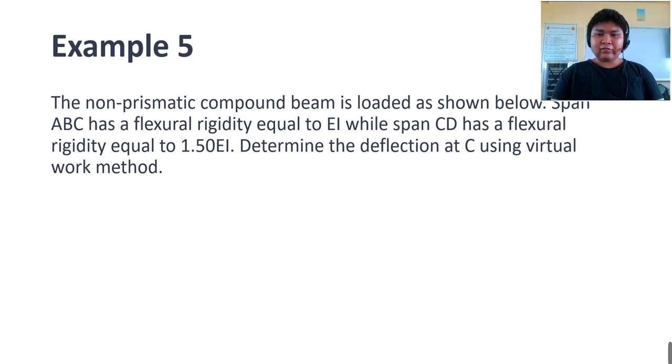So what we will discuss for our lecture video is this example number 5 that you see on your screen. Let's begin solving it. According to the problem, the non-prismatic compound beam is loaded as shown below. Span ABC has a flexural rigidity equal to EI, while span CD has a flexural rigidity equal to 1.5 EI. Determine the deflection at C using the virtual work method.

So this is the beam we will discuss, and I think you're already familiar with it because we already solved the deflection at C using the double integration method. So this time, how will we use the method of virtual work to solve for its deflection?

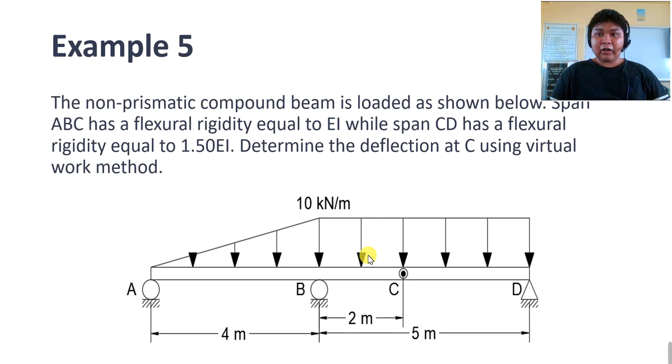So let's go to OneNote. I already pasted the problem. The only thing being asked is the deflection at C. Please take note that this beam is non-prismatic because ABC has a flexural rigidity of EI while CD has a flexural rigidity of 1.5 EI. Okay, so let's start with the solution.

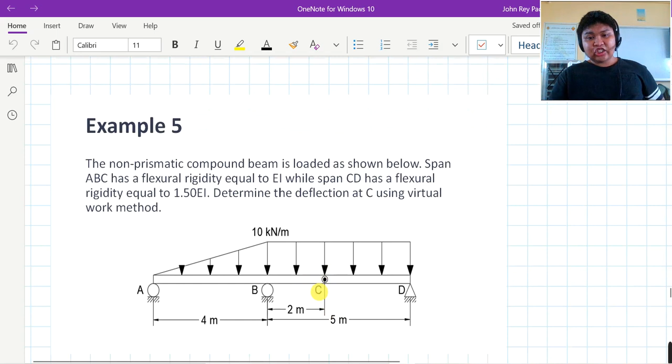The first step is of course to compute the support reactions. For compound beams, we cut at the location of the internal pin, then we find the pin reaction. After that, using equilibrium, we solve for the support reactions.

So here, the reaction at A is 35/6 pointing down. The reaction at B is 365/6 pointing up, and the reaction at D is 15. The reaction at C, since it's an internal pin, is also 15.

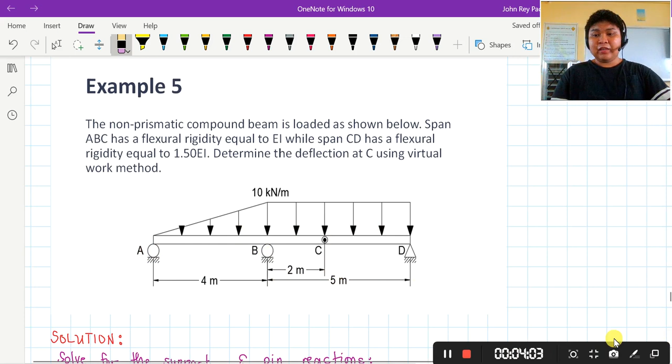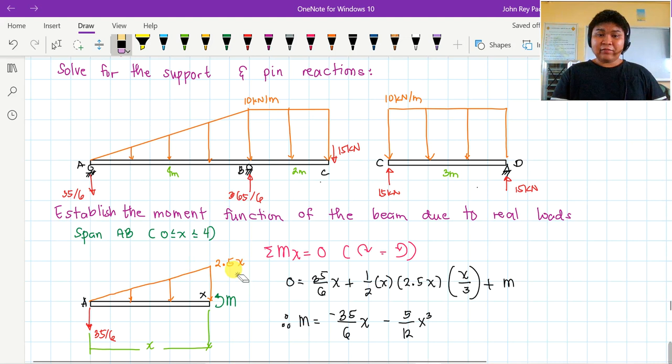Since it's a triangle, I worked out the ratio and proportion myself, so this is 2.5x. If you want to verify this ratio and proportion for the triangle, you may pause this video for a while - that is 2.5x. Let's just do it quickly: here's the triangle, here's the distance x, and the original base of our triangle is 4 meters.

Di ba? So, ito siya. Tapos, yung original height niya ay 10. Hanapin natin ang y. So, y is to x is equal to 10 is to 4, di ba? So, ang kalalabasan dyan, class, 10 over 4 is 2.5, di ba? So therefore, y is equal to 2.5x. So ayan, no? I hope nasundan nyo yung pagka-ratio and proportion ko ng triangle.

Erase na natin to. So next na i-consider natin class is lagay natin yung 35 over 6 na pababa at a distance x. So taking summation moment at the point of cut, yung point x natin, mahahanap mo na yung capital M function natin ay negative 35 over 6x minus 5 over 12 x cubed. Okay, so ayan na siya.

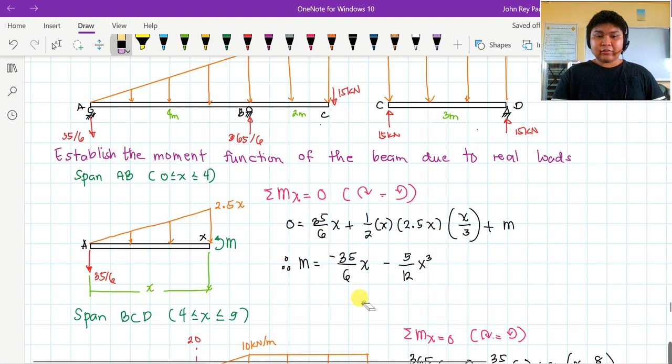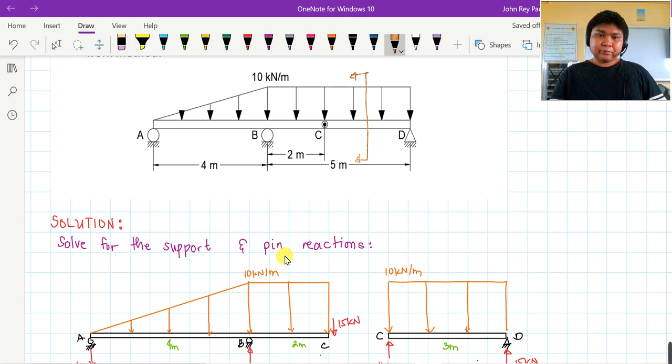On the other hand, sa span BCD, and as I said, isahan lang yan na pag-drawing or pag-establish ng moment function. So, i-cut mo lang siya. Halimbawa, dito, bahala ka na kung saan mo siya trip. Ang mangyayari, erase ko lang to. Baba ko na siya. For BCD, ito na siya. This will be the distance x and ito ay x.

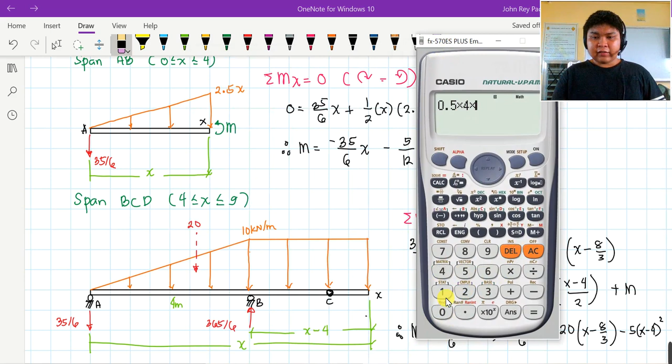Tapos, 4 meter. Then 35 over 6 na pababa. Baka yung iba magtatanong saan galing itong 20. Itong 20 class is the equivalent concentrated load of the triangle. So kung gusto mo makasigurado, ito yung computation niya, 0.5 ng 4 ng 10. So ang sagot natin dyan ay 20.

Now, kung 4 meter ito, malamang yung ating rectangular load ay x minus 4. By the way, 365 over 6 din dito. Okay? So, pag nag-take ka ulit ng moment at x equals 0, isa lang ang clockwise moment natin, 365 over 6. And ang kanyang distance from point x is x minus 4. The rest ay counterclockwise. So, halimbawa, 35 over 6, ang kanyang distance from the cut is x.

Then, itong 20 na tinutukoy ko class, so malamang yung ating center of gravity ng triangle, nandito siya, malamang this is 2/3 ng 4 or simply 8/3. Tama ba? Yes, tama yan. Kaya kung papansinin nyo, yung moment arm class ng 20 is x minus 8/3. Diba no? Yung moment arm niya ay x minus 8/3. I hope that is clear sa lahat.

So, erase ko lang to. Okay na tayo dyan. And another counterclockwise is this rectangular load. So, malamang this is 10, the quantity, x minus 4. Tapos, yung kanyang center of gravity is located x minus 4 over 2. Nakalimutan ko palang ilagay yung capital M dito. That symbolizes the moment function.

So, this is always be a counterclockwise here, right? So, ito na siya. Further arranging the equation, ang magiging result is 365 over 6, the quantity x minus 4, minus 35 over 6x minus 20, the quantity x minus 8/3 minus 5x minus 4 squared. Okay? So, na-establish na natin class yung real moment function natin.

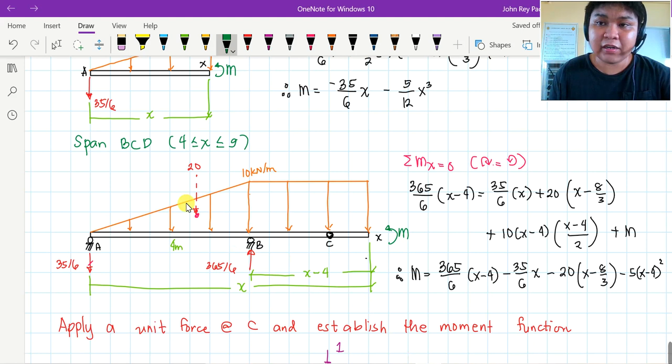Ang next na gagawin natin is i-establish naman natin yung mga moment function ng beam natin if we apply the unit load at point C. Bakit nga sa point C? Kasi class, ang tinatanong is the deflection at C. Okay? So therefore, maglalagay ka ng vertical load dahil deflection ang tanong. So dun mismo class sa location ng pin. And paano natin isosolve yung mga support reactions dito is the same way kung paano natin sinosolve yung support reaction doon sa unang beam natin, doon sa real beam.

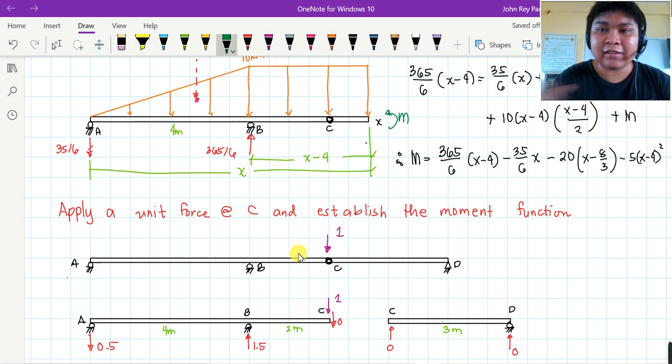Ito no? So, putulin mo siya sa C. So, dito magkakaroon ng question, sir, pinutol ko siya sa C. Saan ko ba ilalagay yung 1? Sa kaliwa ng C or sa kanan? Ang tanong class is yun, pero ang sagot is kahit saan mo naman trip. Ang importante lang naman sa atin class, hindi yung reaction ng pin. Ang importante sa atin class is yung mga support reaction. So ako, inassume ko class na yung 1 ay nandito. Ulitin ko, inassume ko na yung 1 nasa kaliwa ng C.

And therefore, walang load between C and D. Diba kung mapapansin nyo, walang load sa gitna ni C and D. So dapat parehas na reaction ay 0. But taking the moment, automatic dito, 1.5, 0.5 pababa doon. Sir, gusto kong ilagay yung 1 sa kanan. Diba no?

Sabi mo, sir, mas gusto ko sa kanan siya. So may mababago ba? Yes, may mababago, pero yung pin reaction lang class ang mababago dito. Kasi kung titingnan mo ngayon, erase ko lang ito, yung pin magre-react na ng 1, tapos dito magre-react na din siya ng 1. But still class, the reaction at D will remain 0 kasi if you want to take moment at C, nagkontrahan na itong dalawa. Tapos itong 1, ganun din, mag-take ka ng moment sa A, 1.5 pa rin to. And sa B, 0.5 pa rin yung reaction sa A.

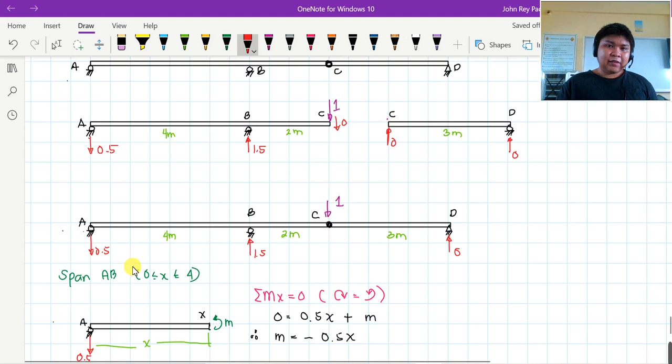So kapag nag-establish ka ng moment function sa AB, halimbawa, i-cut mo lang yan somewhere here. So for the span AB, which is from 0 to 4 siya, ito na ang kalalabasan niya: this is 0.5 pababa and this small m ay counterclockwise. So take moment at x equals 0, yung small m natin ay negative 0.5x. Okay? So yan na ang sagot natin.

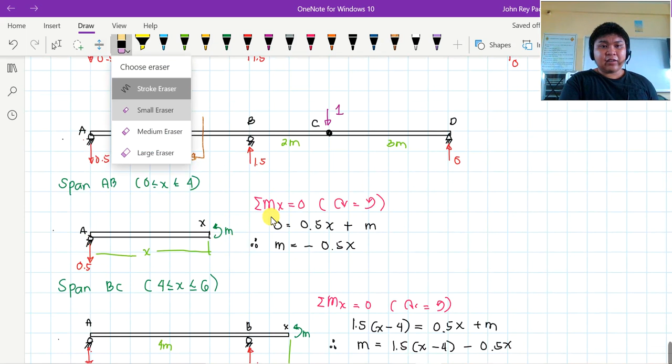On the other hand, kapag nandito naman sa BC, I am now referring to this, i-cut mo lang siya dito sa pagitan ng B and C, and that is from 4 to 6 na. And establish mo yung moment function niya. Ang kalalabasan, idadamay na natin yung 1.5, ang distance niya ay x minus 4. This is a clockwise moment. So equals to 0.5x plus m. So this will be the moment function from B to C. So I hope malinaw yan.

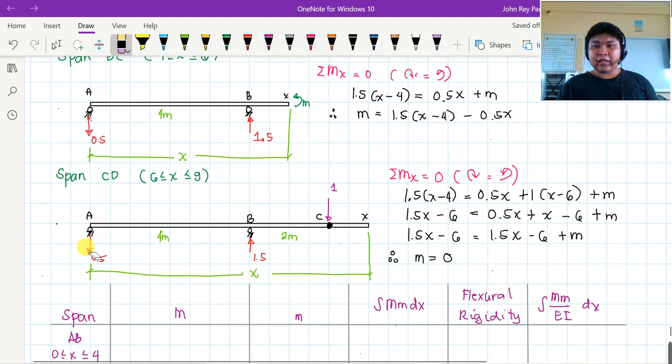And lastly, sa span CD from 6 to 9, ganun din, i-cut mo lang siya class somewhere here. O, bahala ka kung saang portion mo siya trip, basta between C and D lang. Okay, tapos ito na siya: ang clockwise moment natin isa, 1.5 the quantity x minus 4, that is equal to, counterclockwise ito, 0.5x, counterclockwise din itong 1 times x minus 6 plus m. Pag inarrange mo siya algebraically, 1.5x minus 6 kasi 1.5 times 4 is 6, equals 0.5x plus x minus 6 plus m. Ang ending, kapag inad natin ito class, magiging 1.5x din siya. So ang ending dito class, maka-cancelled out din ito, ma-eliminate din siya. So therefore, yung small m function pala natin from C to D ay 0.

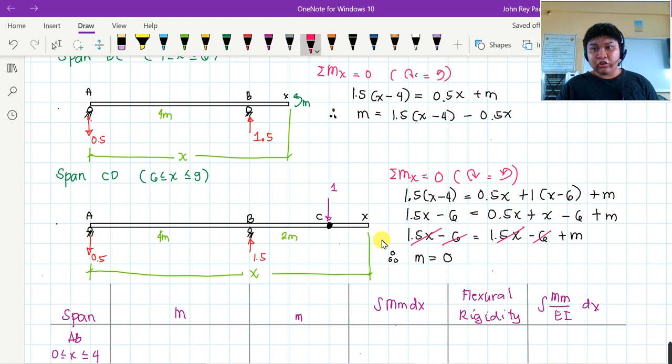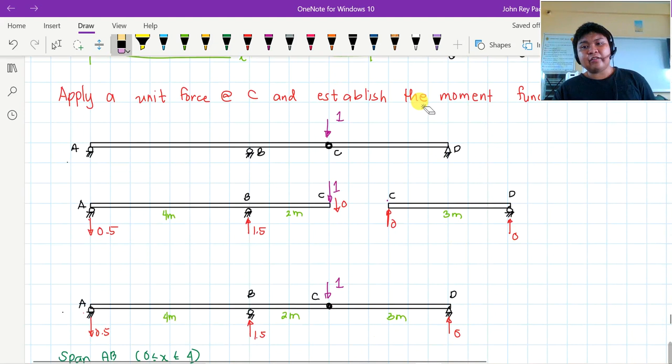Okay, so ayan, na-establish na natin class both the moment functions of due to the real load at the same time due to the unit load. So proceed na tayo sa tabular solution. So ito na yung table natin, nakalagay na siya. Ang gagawin mo lang naman sa capital M, yung AB is from 0 to 4, yung BC is from 4 to 6, and yung CD is from 6 to 9.

So sa AB, na 0 to 4 class, ang mangyayari, isulat mo lang yung capital M na na-derive natin: negative 35 over 6x minus 5 over 12 ng x cube. Okay, so sige sulat natin yon. Negative 35 over 6x minus 5 over 12 ng x cube.

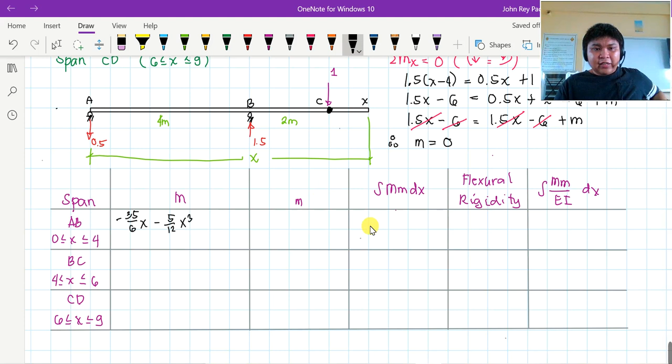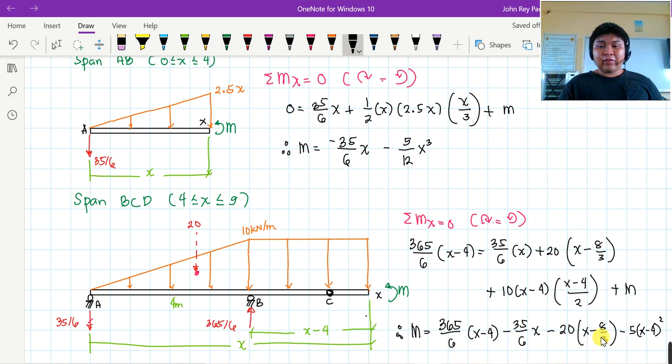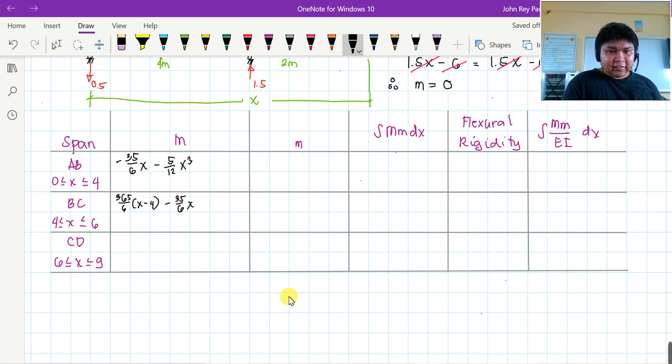Yung BC, sulat natin siya, pero kung maalala nyo, pinag-isa na lang natin yung BC saka yung CD kasi isang function din lang naman ang nagre-represent sa kanila. So: 365 over 6 the quantity x minus 4, minus 35 over 6x, minus 20, tapos ay x minus 8 third, minus 5x minus 4 squared. Okay, sige, sulat natin yan. Parehas sila, no? 365 over 6 x minus 4 minus 35 over 6x. Tama ba? Minsan kasi makakalimutin na ako. Yes, minus 20 x minus 8 third.

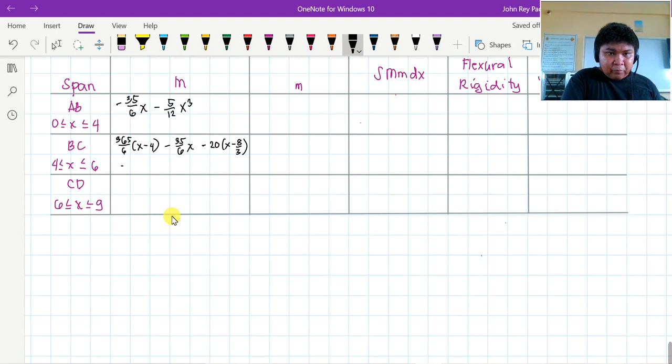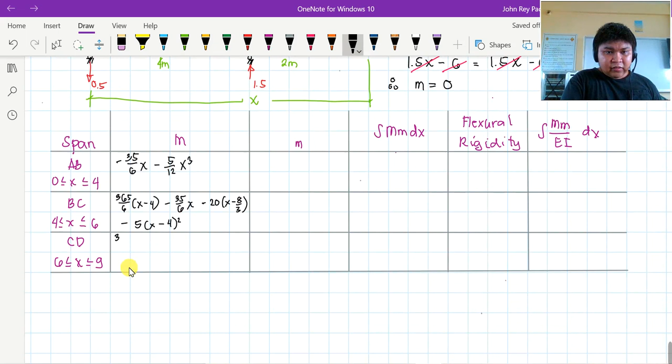And lastly, minus 5, the quantity x minus 4 squared. Let's recheck if this is correct. Yes, correct. And you just copy this for CD, right? So for CD, same thing class: 365 over 6, x minus 4, minus 35 over 6x, minus 20, x minus 8 thirds, minus 5, the quantity x minus 4 squared.

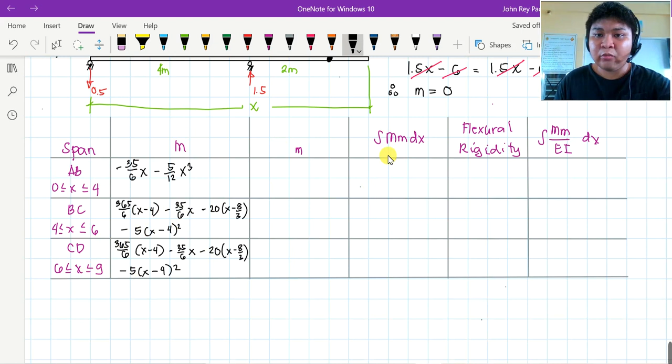After we've written the capital M function, our next concern is the small m. For span AB, it's simply negative 0.5x. So we put that as negative 0.5x. For span BC, that is equal to 1.5, the quantity x minus 4, minus 0.5x. Let's check again: 1.5x minus 4, then minus 0.5x. Lastly, for CD, it's 0. So put that down.

Next process is integration. What we do is start with AB: the integral of capital M. Capital M is negative 35 over 6x, minus 5 over 12x cubed. Then the small m is negative 0.5x. The limit is from 0 to 4. Our answer here, class, is 104.8889.

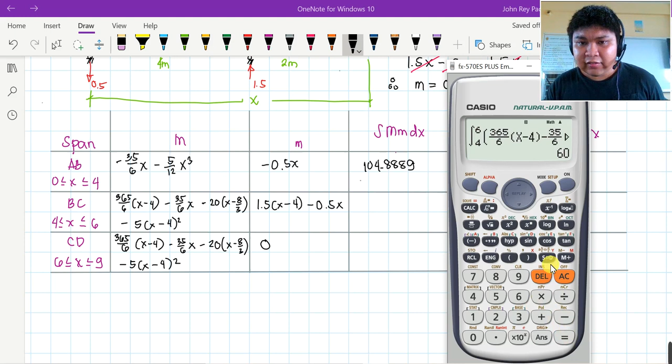104.8889. Next, let's consider BC. That is equal to — this capital M is a bit long — 365 over 6, the quantity x minus 4, minus 35 over 6 of x, minus 20, x minus 8 thirds, minus 5, the quantity x minus 4 squared. That's capital M. The small m is 1.5, the quantity x minus 4, minus 0.5x. The limit is from 4 to 6. Our answer is equal to 60. So just put that as 60.

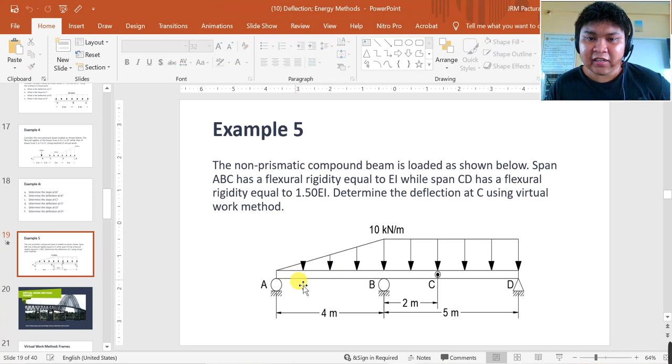Next is the flexural rigidity. Since this is non-prismatic, according to the problem, span A to B is EI, and B to C is EI, because span ABC has a flexural rigidity equal to EI. So both AB and BC are equal to EI. On the other hand, our CD is 1.5 EI — that's what's stated in the problem, that span CD has a flexural rigidity equal to 1.5 EI.

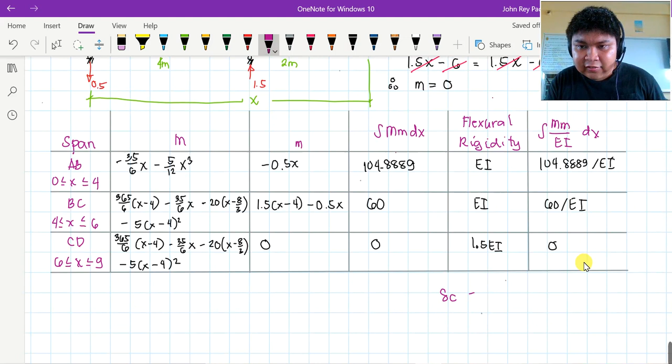So therefore, the last step is to divide by EI: 104.8889 all over EI, then 60 all over EI. And 0 over 1.5 EI is still 0. So we can now conclude, class, by taking the sum of the data in the last column as the deflection at C, which is equal to 104.8889 plus 60, giving us an answer of...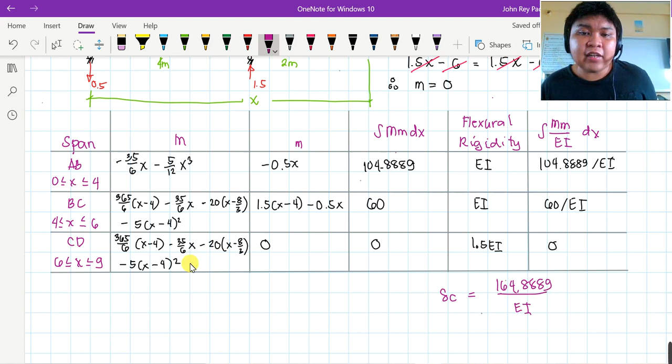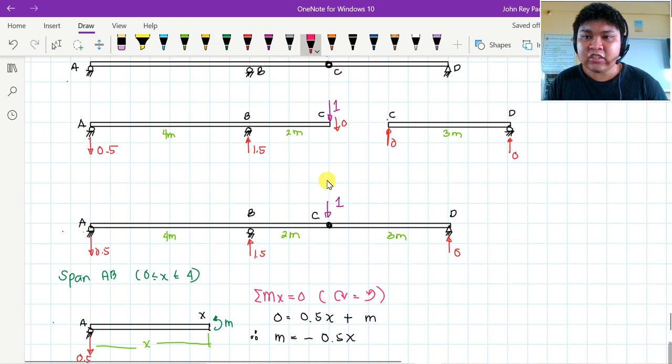164.8889 over EI. So we can conclude, class, that the deflection at C is equal to 164.8889 all over EI. Our assumption, class, for the unit load was that it points downward, so that means our assumed direction of deflection, going down, was correct. So this will be a downward deflection. That's it, class.